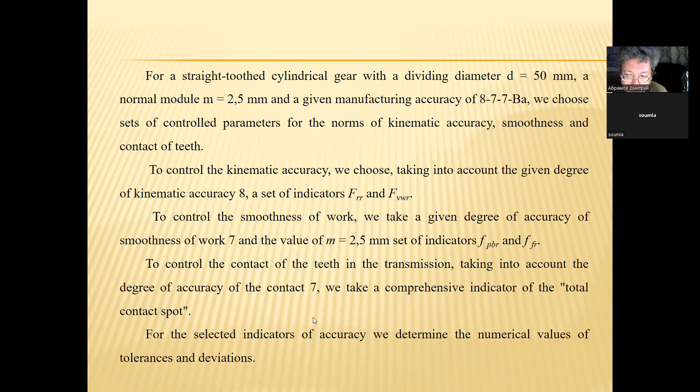For the selected indicators of accuracy, we determine the numerical values of tolerances and deviations. For a given degree of kinematic accuracy, we have kinematic accuracy degree 8: big F suffix r is equal to 45 micrometers and big F suffix vw is equal to 28 micrometers. For a given accuracy of smooth operation, small f suffix pb is equal to plus minus 14 micrometers. f suffix f is equal to 11 micrometers.

And for a given degree of accuracy according to the norms of contact, it's equal to 7. The relative size of the total contact spot: the height of the tooth not less than 45%, the length of the tooth not less than 60%. So when you do your variant of coursework, you can use the numerical values of these parameters too.

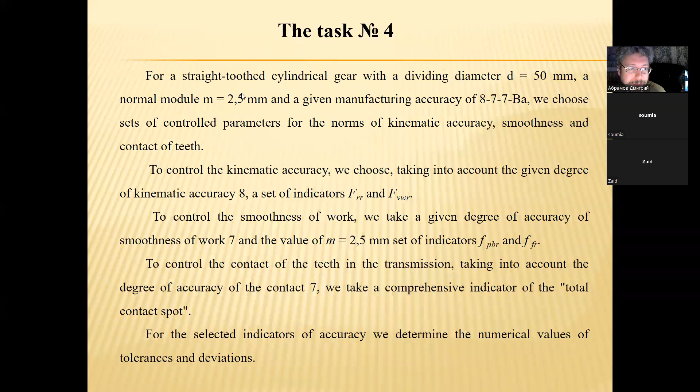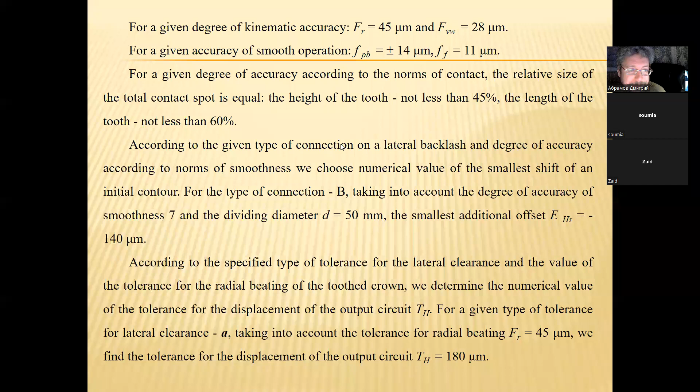Determine the length of the general normal, W suffix 1, for a wheel with a single module. The values of W suffix 1 and Z suffix N placed in the middle column are preferred in the directory. For Z suffix N equal to 3, number of teeth covered, W suffix 1 is equal to 7.66043 millimeters. In your variant, you must choose your Z. So W1 will be equal to 7.66043 millimeters. Then the length of the general normal is 7.66043 millimeters multiplied by module 2.5 millimeters, and we have 19.15 millimeters.

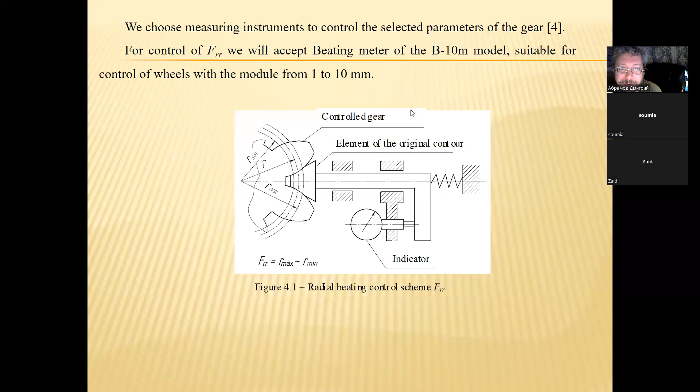The control of f suffix fr can be performed using an evolventometer model BV 5032, suitable for monitoring wheels with an outer diameter from 20 to 400 millimeters and a module m from 1 to 16 millimeters. Our outer diameter is 50 millimeters, between 20 and 400, and our module is 2.5 millimeters, between 1 and 16 millimeters. So we use this evolventometer model BV 5032.

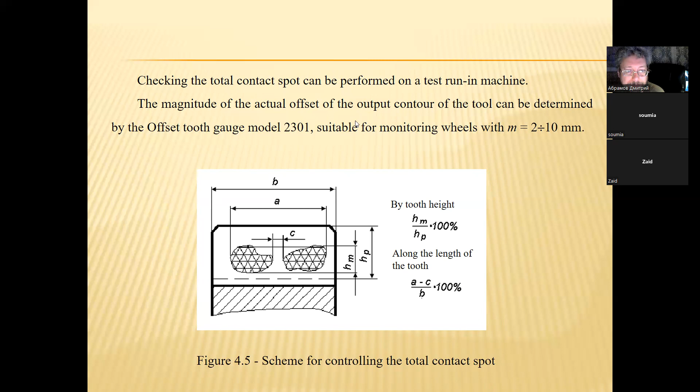By tooth height, hm and hp: above the line is hm, under the line is hp, multiplied by 100%, it will be the parameter by tooth height. The parameter along the length of the tooth is equal to a minus c above the line, and under the line is b, multiplied by 100%. So we use this measuring instrument for controlling the total contact spot. And we show the schemes of control of the selected parameters.

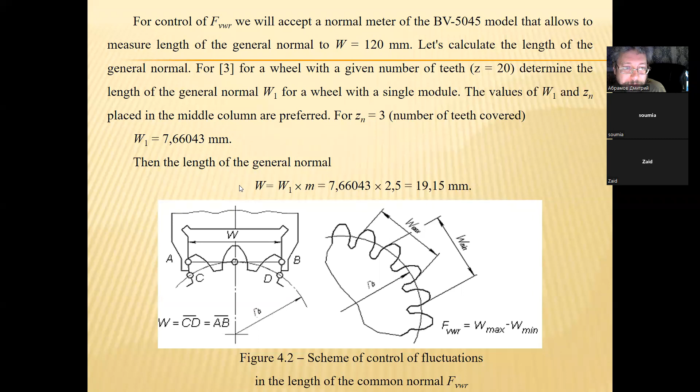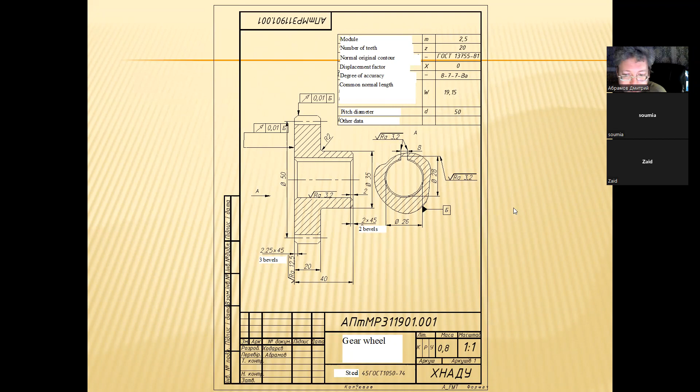Common normal length W, the length of the general normal, is equal to 19.15 millimeters. Pitch diameter small d is equal to 50 millimeters. So there is the drawing of the gear with these parameters. That's all.

Do you have a question about task number 4?